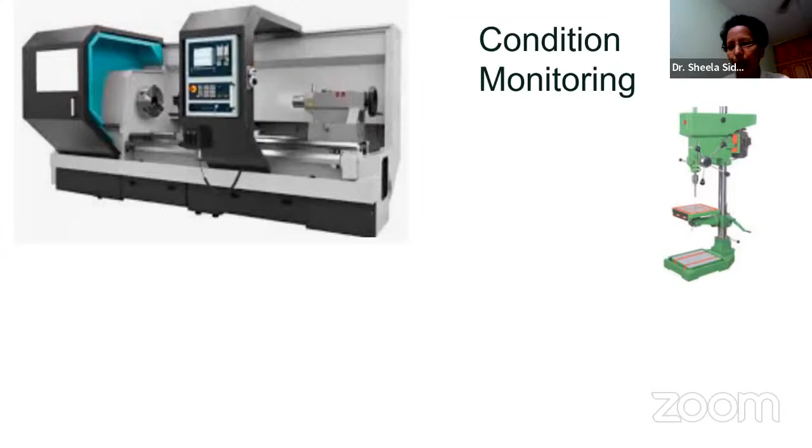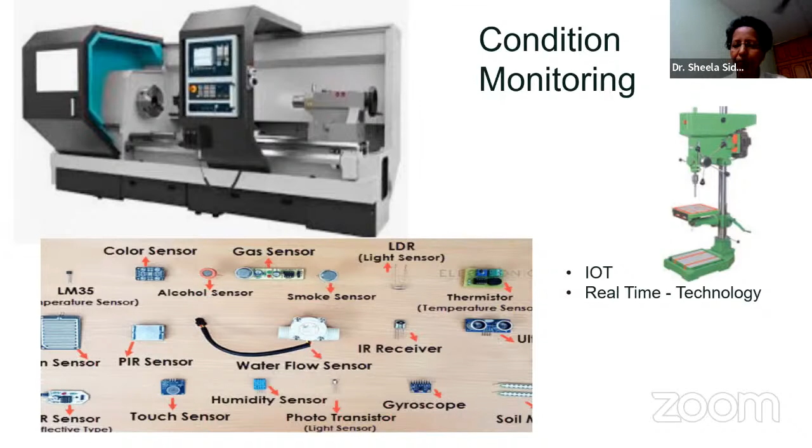Okay. So you name a sensor, more or less they would have mounted it on the complicated equipment for that matter, and they collect real-time data. So per second, fraction of a second, you will start getting this data, and finally, the whole idea is to find out if something is not normal. Okay, so basically, what they will do is they will create one threshold, and say if it is going anywhere above or too below this, then it is breaching, and thereby this is an anomaly.

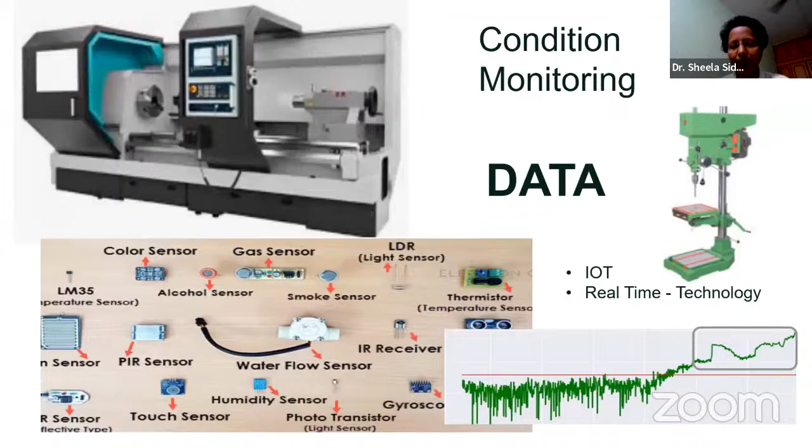Now, from when the machine is performing really good to performing very bad, also very close to the end of its life, the idea of this digital twin is to capture data. Okay, keep mounting these sensors and capturing data. If we ask a very fundamental question here, do we need all the sensors? I mean, all in the sense, I don't mean to say all 100 sensors. Typically, they will say temperature, flow rate, pressure, vibration sensor, and all these sensors they will mount, right?

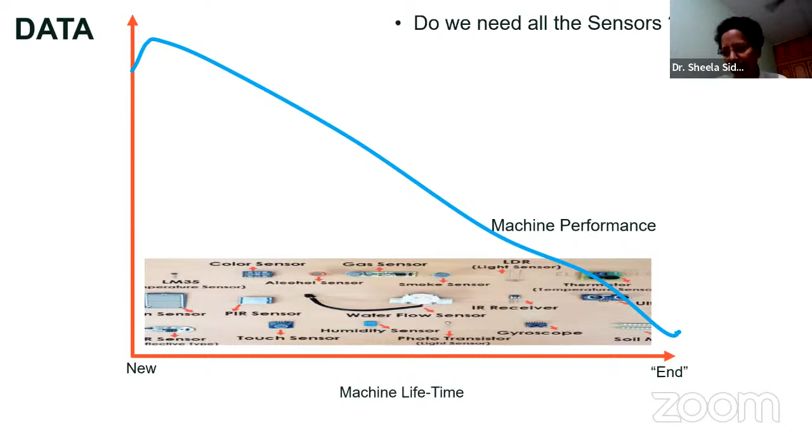So the question is, do we need all these sensors? More specifically, at all the time. So even if the machine is new, do we need it? Why do we need all these things, whether the machine is new or at the rear end of its life? It would be more like taking this very young man who is very healthy, more energetic, and saying that there is a possibility of something happening to you. You never know. Things are very uncertain. So thereby, I will start monitoring you.

And we will shave his head, and then we'll start mounting all sensors on his head and start monitoring the mental health and the brain activities and so on. If we do this, do you think he's going to like it? Whether a man or a woman, nobody likes it. We know how much we spend on the salon. So nobody wants to go around with these sensors. That is true. Similar case with the limbs or the arms. If we say, no, we really need to monitor whether you are performing well. Are you feeling very weak, tired?

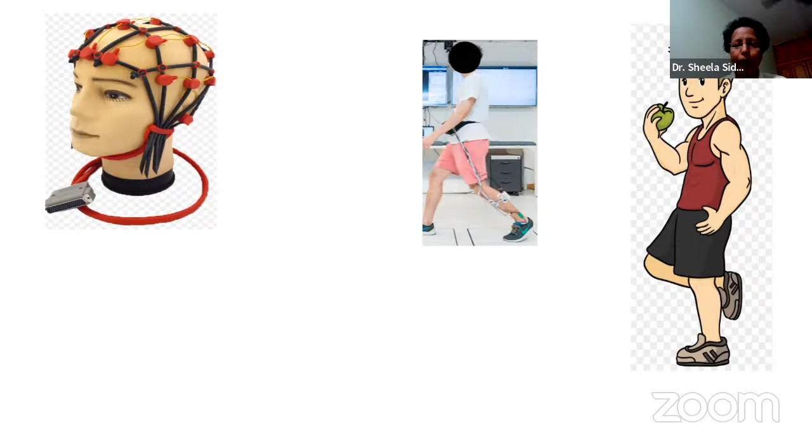And more so, heart is very important. So we'll start putting these sensors throughout, and we will monitor day in and day out for you. We will not like it anyways. Even though it is very crucial, and we know that health is more important, even then we do not want these sensors to be mounted on us. And even today, the vitals are captured in the healthcare scenario very often only when the person is in a very, very critical ICU condition. That's when you will see more sensors and not the human being. That's what it will land up in. But we do not want to land up in such a scenario, but at the same time monitor.

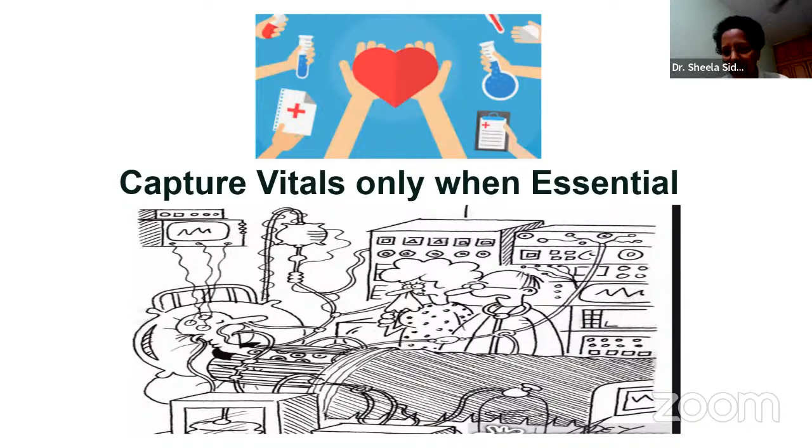So what that means is, when the performance of the machine is deteriorating in this direction, the type of sensors we have to mount at different instances, or the different kinds of machine-related information we capture, would be very limited as the machine is very new. And as it goes to the rear end of its life, it can increase. So thereby, what is more important is to know which sensors to mount where, when, and capture only those. Sometimes even just the machine-related information itself is more than enough. We may or may not even need sensors at times to monitor how the machine is performing.

Okay, so we can let go of some of the things and not monitor so much, and keep only the ones that are essential depending on what stage the machine is at, and monitor them. Okay, so now once we know what to capture when, we have already dramatically reduced the volume of data that we are collecting.

One of the challenges today most of the leaders are mentioning is that they have captured so much data that storing the data or maintaining the data itself has become very, very expensive for them. Forget the fact that they are extracting information out of that data and analyzing and consuming it. That is not even done for most of the data that they have captured. So thereby, you can understand that

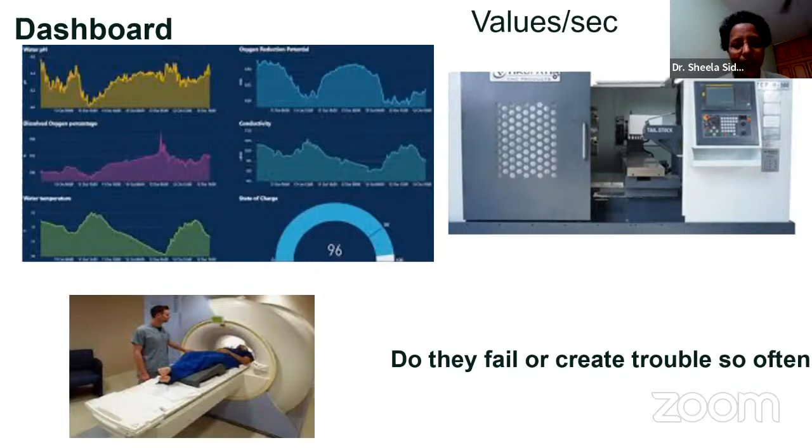Okay, good. So then you might ask, how often do we need to collect? What should be the frequency of data collection? If we start thinking, should we collect them once per month? Maybe hourly, maybe 30 minutes, or maybe on a uniform note. So should it be consistently every 30 minutes, uniform? So if you start digging deep into this, you really are kind of puzzled.

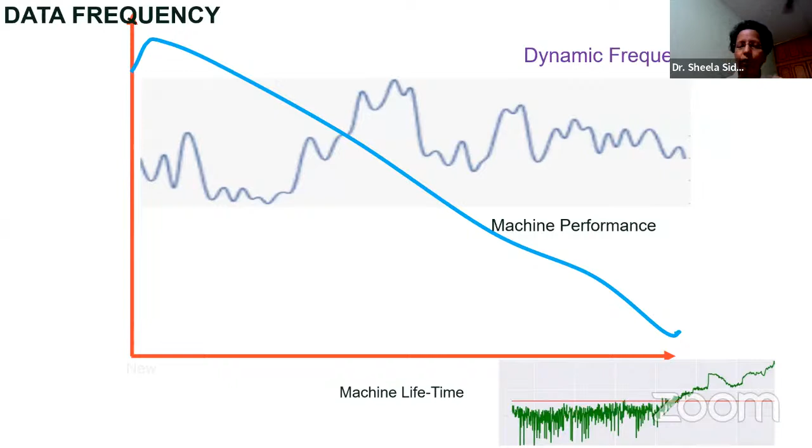Now, with all this circus, we have given a wonderful, very efficient, cost-effective solution. Let's see what really happened once we gave this solution. Say this is a very complex equipment that was monitored, only the very important vitals, in a cost-effective way. The moment we throw an anomaly, the expectation is the technician is going to come running, because the equipment needs attention.

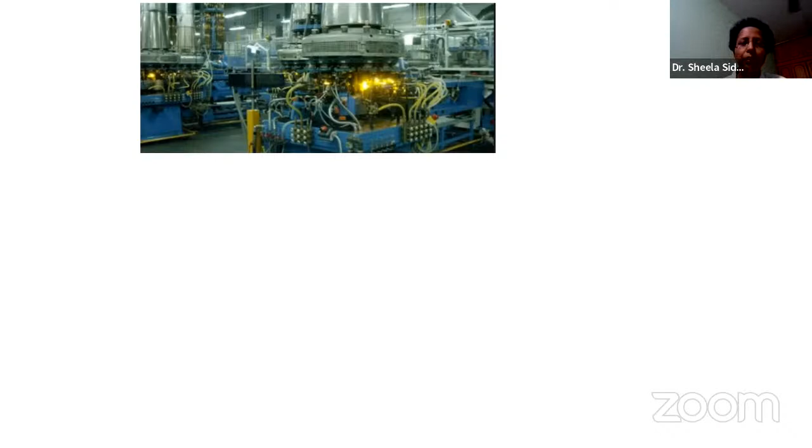The moment the technician comes running, our data scientist would give this plot which says, see, I have monitored parameter number 10, and there is an anomalous behavior here. I'm even feeding you this wonderful information, so go ahead and fix it. From a data science angle, it sounds wonderful; we have done our job. But the technician would be all the more puzzled.

He will be puzzled because the equipment is still working, we are throwing alerts in advance, and he does not know what to fix. The technician only knows by the symptoms: only if it has stopped working, is making a lot of noise, is going slow, or got stuck, then he knows to repair it. Looking at the signal, he has not studied this language at all. So how is he going to connect the parameter signal we have derived with

the equipment or the components? That is where most condition monitoring and digital twin concepts stopped, at the anomaly detection phase, and if you stop right there, it will be of no actionable benefit to the industry. So we go one step forward and also help identify which component precisely needs maintenance or attention, whether repair, replace, or whatever it is.

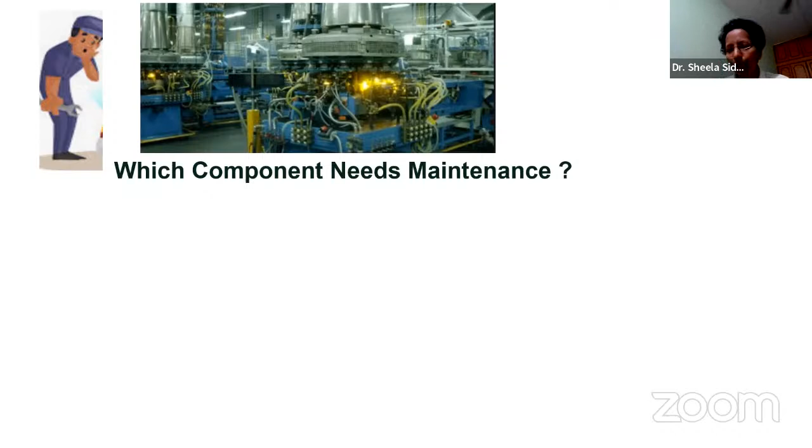In order to do that, we understand the relationships between, say, the 10 sensor data or 10 parameters captured from the equipment, so that anomalous behavior is mapped to the corresponding component. The mapping could be one to many or many to one. But we still extract which ones need attention.

Great. So now we have helped the technician: the moment this parameter goes out of control, we are not going to give him any signal information or plots. I'm going to directly tell him what components need attention. Good. So now do you think he's happy?

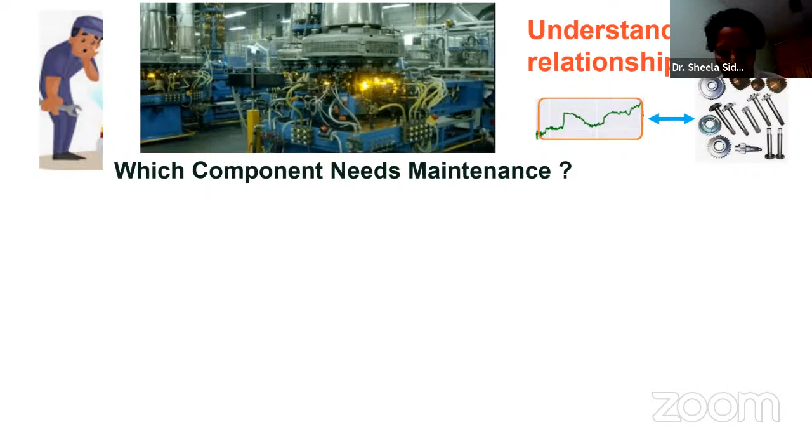Well, what he does not know is, okay, it needs attention, but what kind of an attention? What do I need to do there is still a question mark, because it is still working there for him. Okay. So what we do in the next step is help him by guiding, and we provide recommendations to say what is the next action that he needs to check and work on.

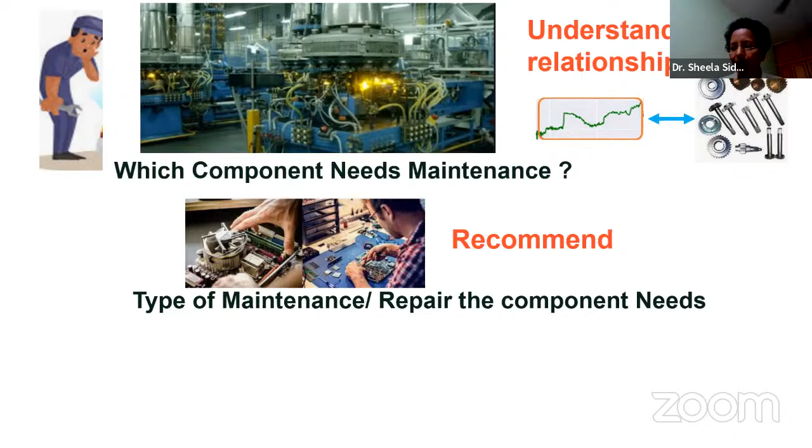Okay. So very detailed guidelines are also provided depending on which component and what actions need to go in place. This, of course, requires a lot of history information in terms of, okay, this is the component, what are the type of fixes that are there. If it's the next component, what are the type of fixes that are available. So based on that, a recommendation is provided.

Now you will see that the technician is all happy because he now not only arrives wherever the equipment is, but he also knows what he needs to be doing. Okay, so that's the kind of spoon feeding that's going to help him fix the kind of issues that are seen in advance.

We do not stop our journey there. We want to go ahead and do the job scheduling on the machines so that the machines are utilized in a very nice manner. What we have noticed is some casting machines, for example, are heavily used and some of them are leanly used for whatever reason.

So if there is no equal balancing of the stress level or the load level on different equipment, we can see that some of them underperform and some of them overperform, or the stress load increases and thereby the health is also gone for a toss.

So what we also do is help them balance the workload depending on how efficient the equipment is, so that while we're monitoring and giving the maintenance information, we are also seeing if we can reduce the amount of maintenance that this particular equipment needs.

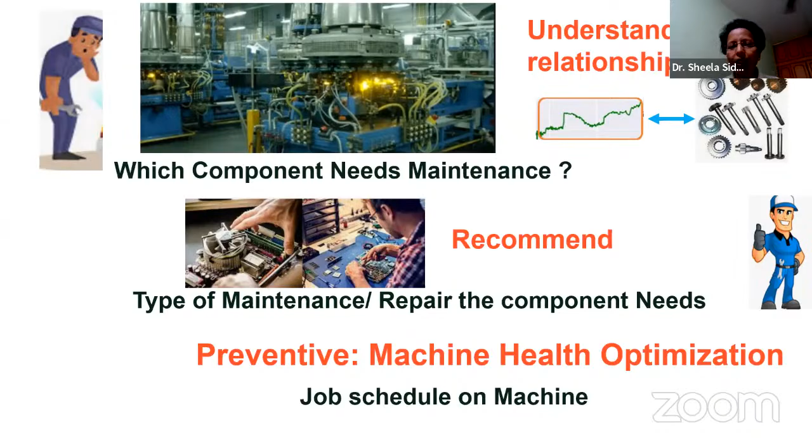Now, with this, one of the use cases is kind of what I wanted to talk about. I would love to now hear if there are any questions on this before I move on to the next story or the use case. Any questions?

Participants, madam has given a session for questions. Any doubt, anything, whatever was presented, you can ask now. You can proceed, madam.

Yes, sir. So you're suggesting that I just continue and there are no questions from this? I just wanted to hear, because you are seeing most of the equipment very closely. So do you really think that these kinds of solutions are going to make any difference? Your feedback is also something that would be nice to hear.

Yeah, it was a very good start, madam. They had a basis to understand the concepts, starting with what is maintenance, how it's addressed and all. It was a very good starting session, madam. Thank you, madam. Thank you.

Oh, okay. So anyway, I was just talking about the solutions. If you have seen anything implemented within your organization or your industry, and if you have seen any progress in this dimension, how do you see getting these kinds of solutions integrated into your company? So that's what I was looking at.

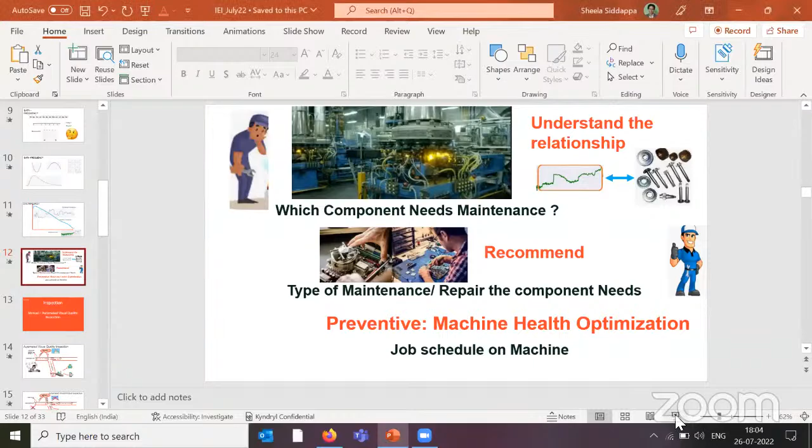Thank you, madam. You can proceed further. We'll keep the questions at the end, madam. Okay. Please. Thank you. Please. Okay.

So let me now move on to the next use case. This is something very common that most of you might have heard of or seen. This is where the inspection of the product that is manufactured takes place. So typically, if you're talking about a tire manufacturing company, we notice that if there are 50 people involved in the production, 100 people are actually doing only the inspection part of it. So double the number of people are involved in the inspection. And that's a tedious activity as well.

So you're aware that there are data science solutions which are more visual quality based. That means just mounting the camera, taking the images, and the algorithm is able to do the inspection on behalf of human beings. So this is something that you have noticed, but I will be going through a journey which is kind of different from the normal.

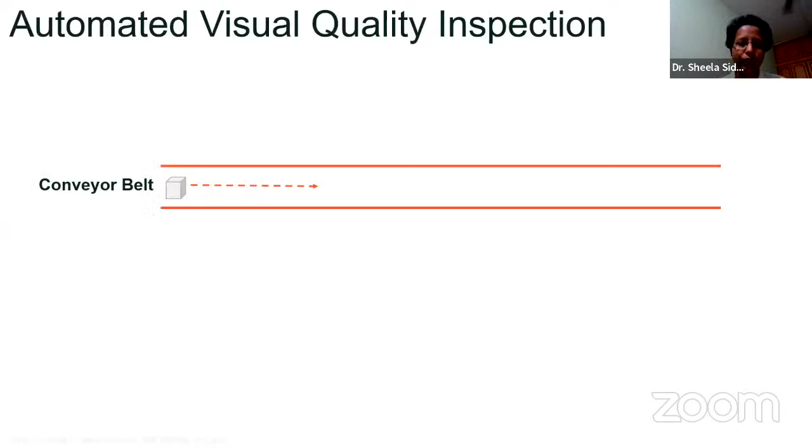So when visual inspections are going on, say this is a conveyor belt and there are products going on the conveyor belt, which is a completed product for that matter. So the idea is to mount the camera in such a position, maybe one or more cameras for that matter, to capture different angles of the object and take pictures to be able to say whether it is good or bad.

But in order to do that, we need the images to be taken, which is actually data for us, and mark wherever there is an anomaly. So say there is a box here. Now, if the edges are broken, or if there is a crack, or if there is a dent, then those have to be marked. Because once you mark them and give them, that is when the machine learning algorithm or deep learning algorithm is going to understand what is defective and what is non-defective.

Okay, so this kind of annotation or marking on the images is very much essential. And depending on the product, sometimes they ask for even 5,000 images or 10,000 images to be provided to be able to understand the nitty-gritty details and the different types of defects that are possible. And once the images are all marked and given, there is a combination of both good images as well as images of defective products.

Okay. Then that goes to the data scientist, who develops an algorithm on this kind of a data set. Basically, he's going to help in classifying and saying, okay, this is defective, non-defective, good or bad. And once we know it's a good product, then it will keep going. On the other hand, if it's a bad product, then it will go into the defective basket.

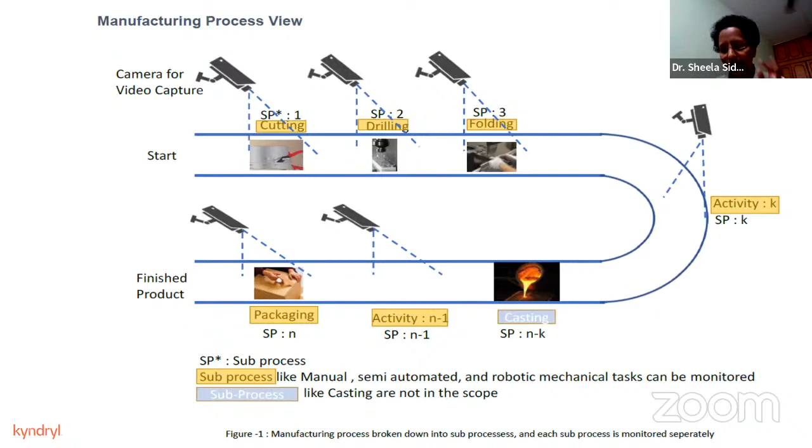say this is a folding activity. It could be for the airbags in the car or leather seat covers and things like that, where folding is required, which could be completely manual or semi-manual. So what we do here is, again, we do not ask for a lot of information on how you do it. Just one reference video showing the correct operation process adopted in doing that activity. So either it's cutting or folding; I've taken folding as an example here.

The various steps it has to go through, we extract from the reference video that you have. That's all. Even if you're using one video to train your new employees or trainees, that is also one reference video. That's more than enough for us to generate the data and identify the steps. And the way we do that is, any video is converted into a bunch of images. The same step could be repeated 100 times, but we extract only the key tasks from that, and then use them for comparison in real time.

I'll just share this. So for simplicity, and to begin with, how we started was, we had one of our employees himself start folding a shirt. Okay. So folding a shirt took a few seconds. And when he did this activity, and when we took that few seconds video and converted it to a bunch of images, it was around 1,000 different images. Of course, when we say 1,000 images, there's a lot of repetition.